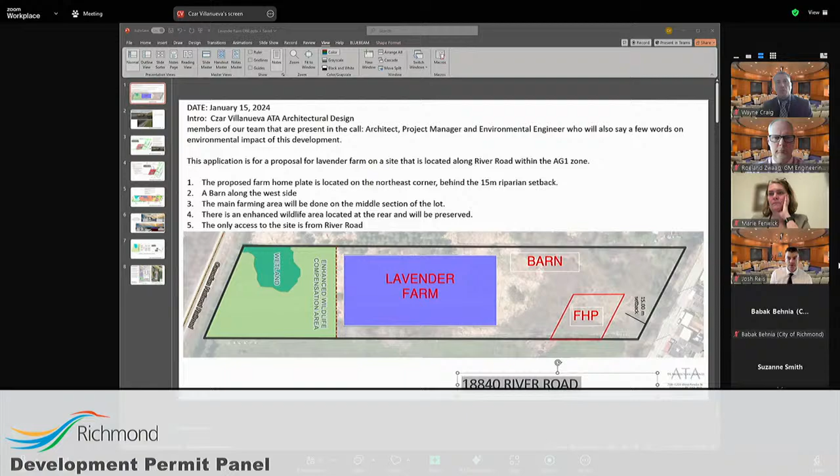This application is for a proposal for a lavender farm on a site located at 18840 River Road. Sorry, Czar, if I could interrupt, are you able to maximize your screen so that we're just seeing the slide? Thank you. Is that better? Great, thank you. Yes, no problem.

The proposed farm home plate is located on the northeast corner of the lot. It's well behind the 15-meter riparian setback. There's a barn along the west side. The main farming area will be done on the middle section of the lot, and there's also an enhanced wildlife area at the back that we plan to preserve. The only access to the site is along River Road.

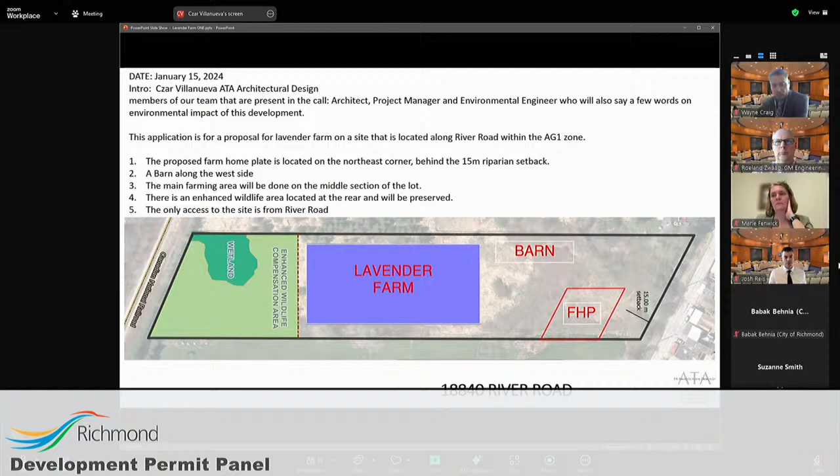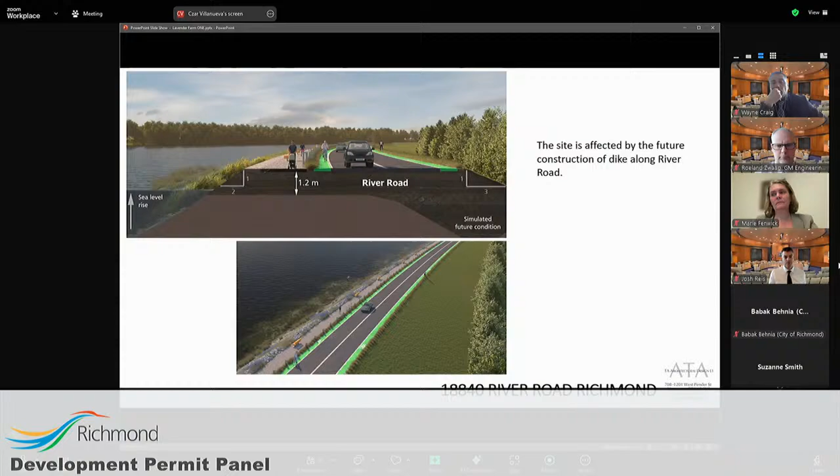We're utilizing the existing driveway along the front. As you know, this site will be affected by the future construction of the dike along River Road, so we've had to move the farm home plate 21.4 meters away from the front line. This will allow for a 7.5 meter dike service and a 13.9 meter wide dike.

The current flood construction level is at 3.5 meters, which is being elevated to match the proposed height of the future dike at 4.7 meters.

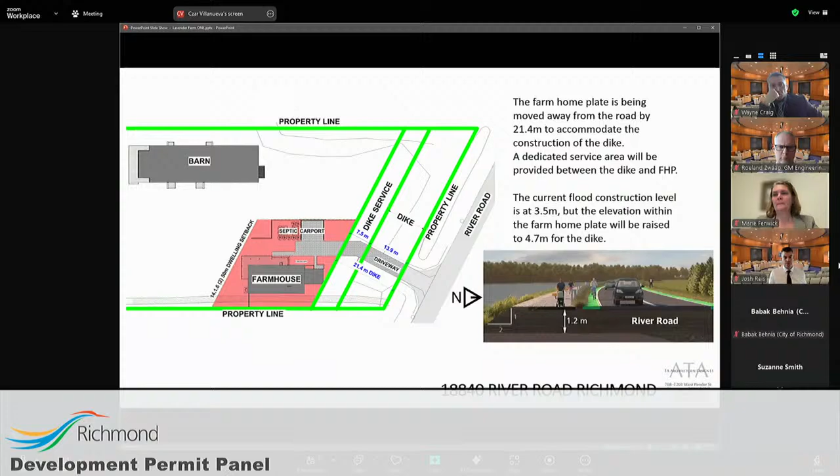The farm home plate, shown here in red, will be the host for a two-car open carport with a level 2 electric vehicle charging station. Adjacent to the carport is the septic tank.

A single-family 3-bedroom farmhouse with a 1-bedroom secondary suite will be the main house for the farm workers. The farmhouse's proposed GFA is just a little less than 10,000 square feet, well below the permitted GFA of 60,000 square feet.

The farmhouse is 2-story, 8.17 meters in height, and the carport is a single-story, 3.41 meters in height. The main driveway access to the site is in the shaded area shown here. We've allowed for an area so a car can drive through to enter the back area.

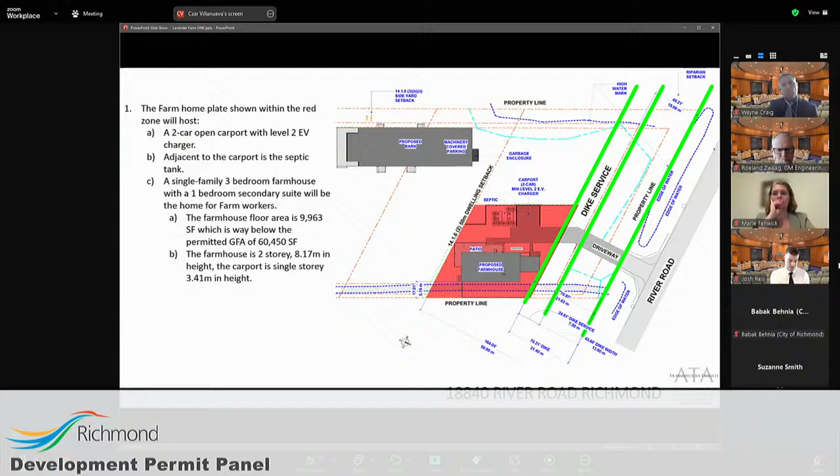The proposed barn is situated along the west side towards the front, avoiding the sensitive ecosystem shown here in green. The barn area will basically be used for production and processing of lavender farms, and it will also be used for parking of machineries.

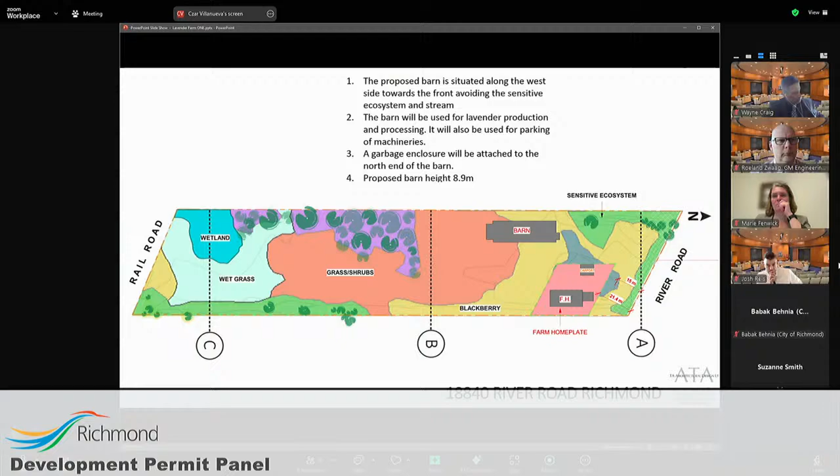Garbage enclosure will be attached to the north end of the barn, and the proposed height of the barn is 8.9 meters. The building design is basically slim, narrow, and rectangular.

We've basically created a view corridor overlooking a scenic lavender farm. Once the dike is elevated, this is the farmhouse, and here's a view corridor between the farmhouse and the carport, and a wider view between the farm home plate and the barn.

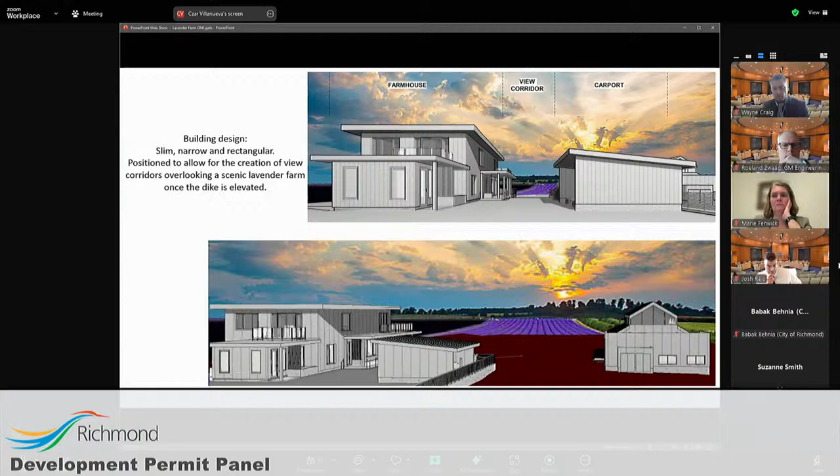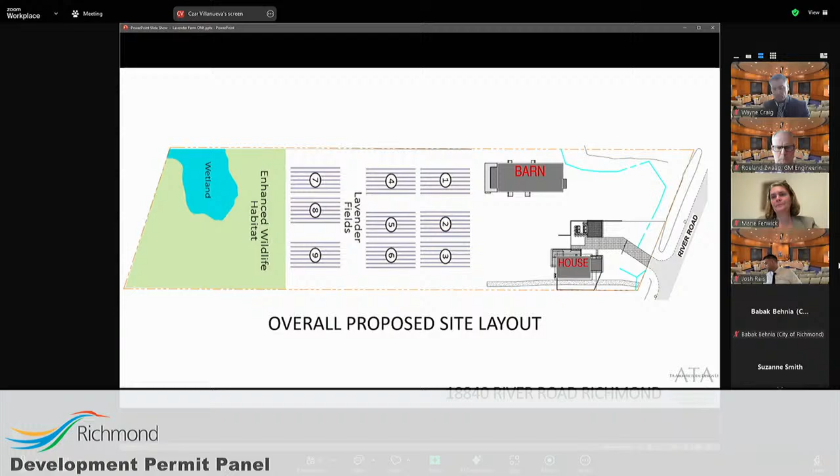Our environmental assessment of this site concluded that lavender farming is the most optimum choice for farming, since it's not suitable for a broad selection of crops. The area at the back is the least suitable for farming due to lower elevation and soil condition, being wet and unproductive. It would basically be much more costly to bring to farming, so restoring it ecologically is the best option.

We also have now Daniel McAllister, the environmental engineer, who will say a few words on the environmental topic. I will pass this on to Dan McAllister.

Hello, everyone. Can you hear me? Yeah. If you could bring up that last screen again. Thank you. Perfect.

Just speaking to the environmental sensitivities of the site. Most of the area on Richmond's city mapping is classified as an ESA under the wetland category.

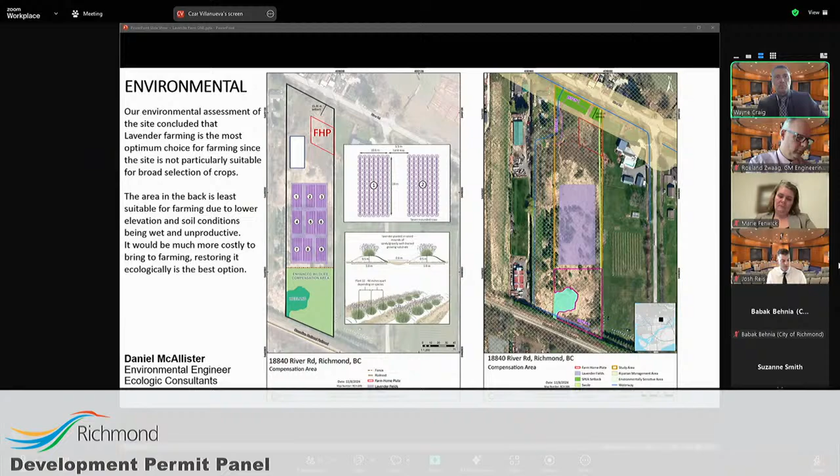Josh, any staff comments on this application? A couple of comments, Mr. Chair. The farm home plate for this project has been set back from River Road in order to accommodate future diking infrastructure.

The applicant has proposed an area of just over 3,700 square meters at the south end of the site for environmental enhancement and compensation in consideration of the single-family building. This area is to be planted with a mixture of native shrubs and trees. No enhancements are proposed within the RMA area along River Road, as this setback area would be used for future diking improvements, so no enhancements are proposed there at this time.

None of the agricultural uses, the planting of the lavender, and the barn structure are part of this approval. It is solely limited to the encroachment of the residential use. No improvements or changes are proposed to the area located southwest of the site.

The site is a hooked parcel. There is a part on the south side of the railway. It is also not included in this application in terms of any enhancements, improvements, or disturbances occurring within that area. That concludes staff comments.

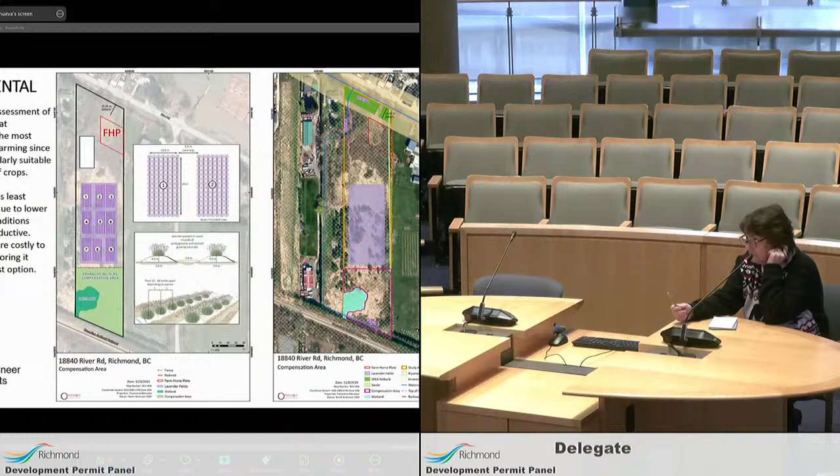Sorry, Czar, maybe if you could share your screen again with the site plan and just show where the driveway may extend. I believe what you've indicated is that the driveway providing farm access will be between the proposed house and carport, then go to the barn, but is not anticipated to extend beyond the barn. Is that correct?

Right, yeah. So the main middle central section of the lot is basically for farming. The existing driveway is where this shaded area is right now, this is where the carport is, the farmhouse, on the west side. If there's any access to the back area, it will be through this road. The barn will basically eclipse any van that goes through to access the site, and there are no areas provided for any trucks to go through the farm area. So it will basically stop somewhere in here.

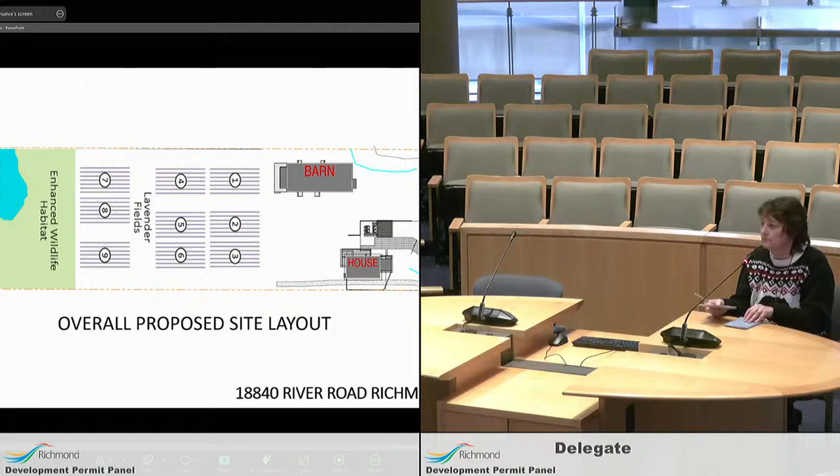Okay, thank you. Ma'am, does that answer your questions? It certainly does, thank you. All right.

If there are no other delegations on this item, I believe that does bring us to panel deliberation. If I could kick this off, I really appreciate the compensation measures being proposed as part of this application, and the efforts made to focus that compensation in areas which currently provide some habitat function. Having said that, there are a couple of measures I would like to suggest be further considered before this application is forwarded to council, and I'd ask the other panel members to consider these as part of any motion should we get to that.

One would be that there be consideration given to extending native landscape, native planting within the farm home plate. The second would be to work with city staff to try and clarify the process to be followed with respect to fill permissions from the Agricultural Land Commission. I see panel members nodding, so with that I'd be prepared to suggest that as direction, subject to any additional comments you may have.